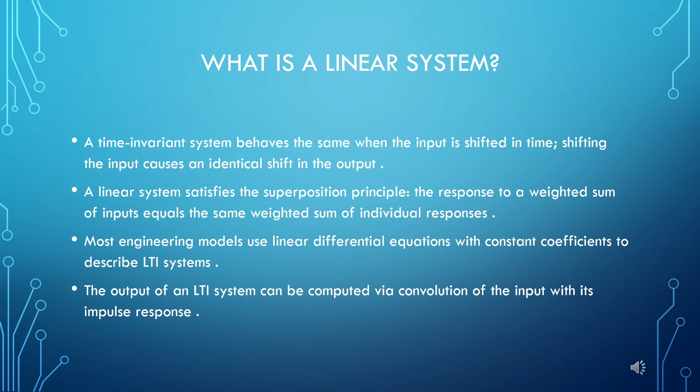Linearization and transfer functions. Real machines and physical processes are often nonlinear, but around a steady operating point, their behavior can be approximated by a linear model. This process is called linearization, and it yields a transfer function or a state space model that relates inputs to outputs through linear differential equations.

These models allow us to analyze stability, frequency response, and transient behavior using tools like Bode plots and Nyquist diagrams, and to design controllers such as PID or state feedback controllers. By reducing complex dynamics to an LTI form, we gain insight and predictable performance.

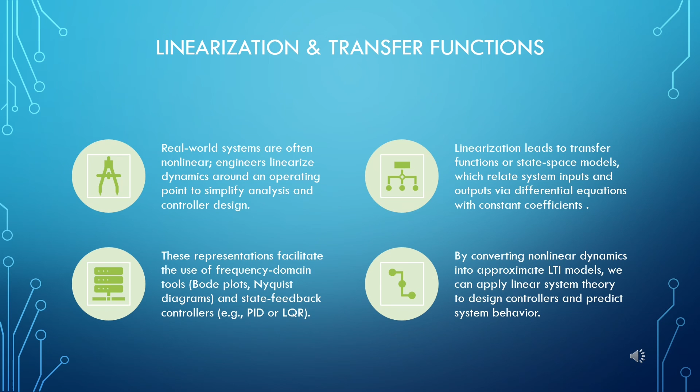Linear equations are the foundation of aviation systems. Autopilots use them to keep the aircraft steady, while control surfaces adjust flight paths through linear feedback. Inertial navigation and radar use linear math to estimate position and detect signals. Even anti-lock brakes rely on linear control to prevent wheel lock and keep the plane safe during landing.

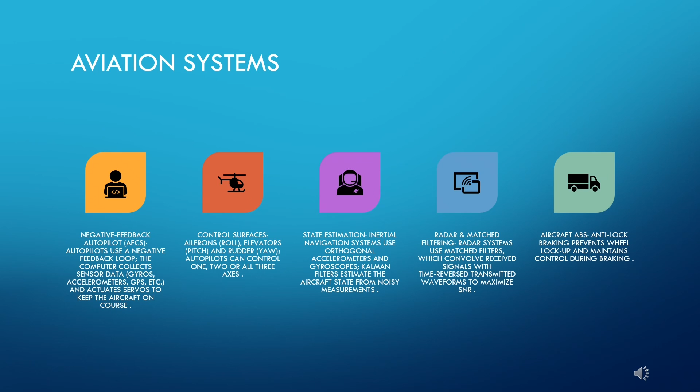In aviation, autopilots provide a classic example of negative feedback control. Sensors such as gyroscopes, accelerometers, GPS, and airspeed indicators measure the aircraft's state and feed data to a computer. The computer commands servo motors to adjust control surfaces.

Simple single-axis autopilots correct roll by moving the ailerons. Two-axis systems add elevator control for pitch, and three-axis systems include the rudder for yaw. Servo motors act as the aircraft's muscles, converting electrical commands into mechanical motion.

By linearizing the aircraft dynamics around the trim condition, engineers design autopilot gains that maintain stability and provide smoother flight than a human pilot can achieve, extending even to the autoland system that flies an aircraft down to the runway in poor visibility.

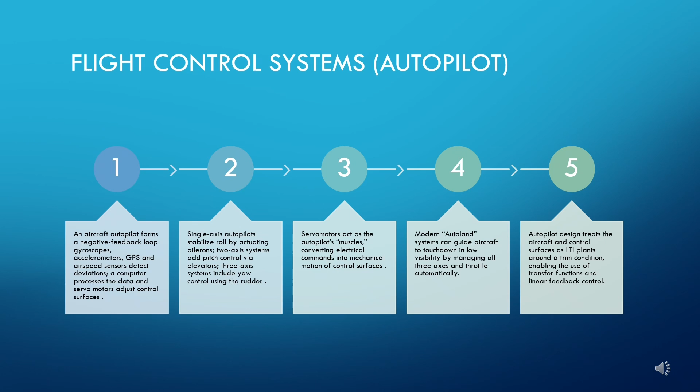Radar systems illustrate linear filtering on a different frontier. When a radar transmits a pulse, the echo received from a target is a convolution of the transmitted waveform with the target's response. Matched filters correlate the received signal with a time-reversed copy of the transmitted pulse and are proven to maximize the signal-to-noise ratio.

In practice, radars employ banks of matched filters or pulse compression techniques to cope with the Doppler shifts caused by target motion and to improve range resolution. Designing and analyzing these filters relies on the linear system perspective, treating convolution and the Fourier transform as fundamental operations.

A self-contained inertial navigation system uses three orthogonal accelerometers and three orthogonal gyroscopes to measure linear acceleration and angular velocity. Integrating these signals yields estimates of velocity, orientation, and position, but sensor biases and noise cause errors to accumulate over time.

A Kalman filter combines a mathematical model of the vehicle's motion with noisy sensor measurements to produce an optimal state estimate with minimal variance. Widely applied in aircraft, spacecraft, and mobile robots, the Kalman filter exemplifies linear estimation. It assumes the underlying dynamics are linear and updates the state estimate recursively as new data arrive.

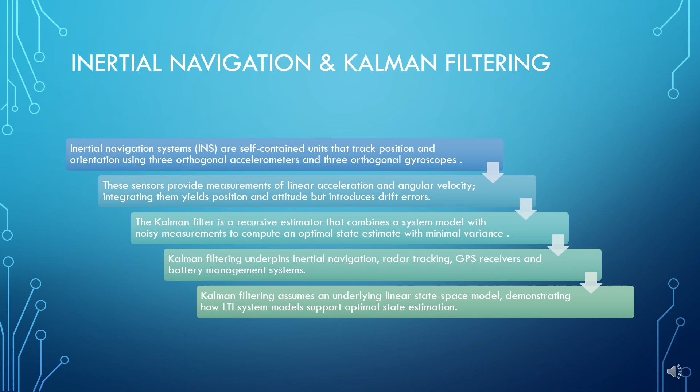At sea, autopilots perform a similar job. A typical marine system comprises a controller, a heading sensor, a computer, and a rudder sensor. The fluxgate compass wraps coils of wire around a ferric core. When Earth's magnetic field cuts through the coils, it induces a voltage that indicates heading.

Advanced systems integrate GPS, wind vanes, rudder angle sensors, and gyros to hold a course and optimize fuel consumption. Like aircraft autopilots, marine autopilots tune feedback gains so that the vessel tracks the desired heading without oscillation, an application of linear feedback control in a hydrodynamic environment.

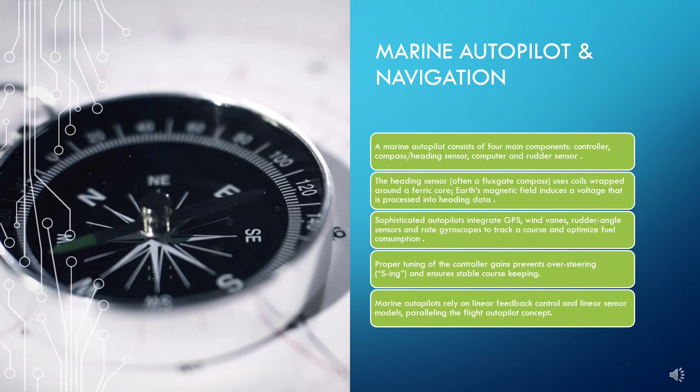In automobiles, cruise control maintains a steady speed by continuously comparing the actual speed measured by the speedometer to the driver's set point. If the vehicle is slower than the desired speed, the controller opens the throttle. If it's faster, it reduces the throttle. Properly designed cruise control uses proportional-integral control to keep the speed near the set point despite hills or wind.

Modern adaptive cruise control adds radar sensors to maintain safe following distances. Again, the car's longitudinal dynamics are approximated by a first-order LTI system, allowing engineers to design gains using linear system theory.

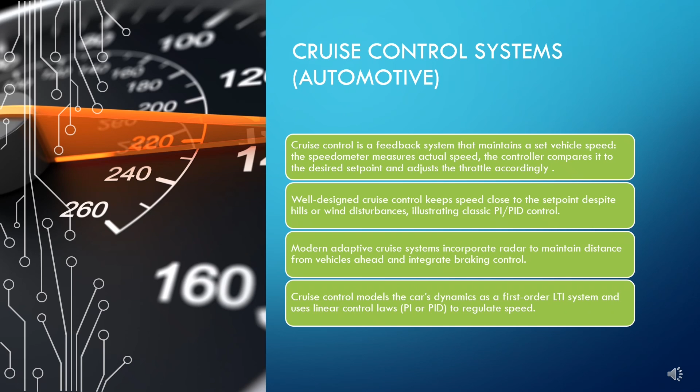An anti-lock braking system prevents the wheels from locking during hard braking by sensing each wheel's angular velocity and modulating hydraulic brake pressure accordingly. The controller rapidly reduces brake force when a wheel nears lockup, then reapplies it to maintain traction and allow steering control. This cycle repeats many times per second.

Although tire-road interaction is nonlinear, designers approximate the wheel slip dynamics by linear models within the operational range and implement feedback controllers to achieve robust stopping performance.